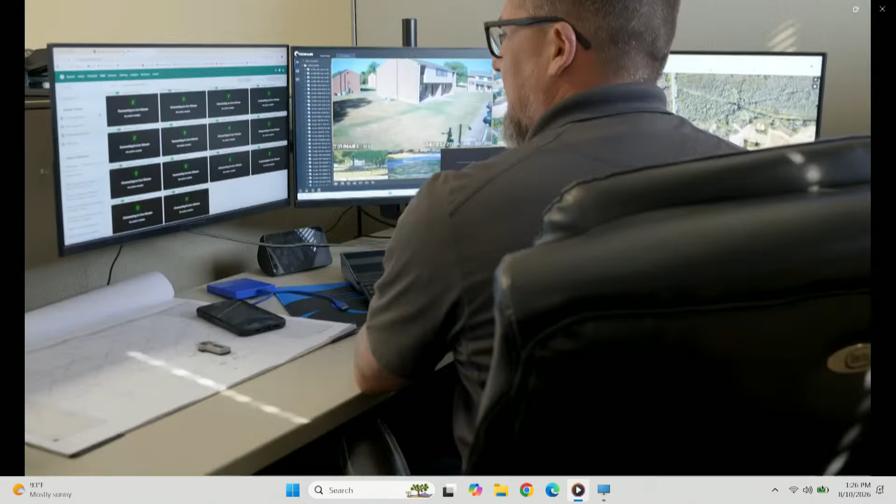The initiative combines a real-time crime center with a drone first responder program, enabling in-house operators to launch drones and gather critical information on the scene of a call and relay it to responding officers. The cameras help serve as a multiplier for police presence, such as by alerting the department of crowd situations where they may want a patrolling officer to observe in person.

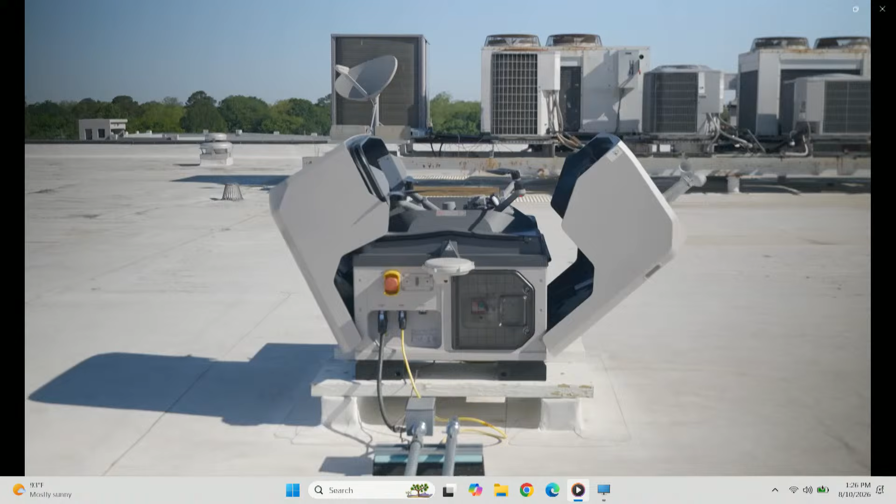The initiative makes use of 3 dock-mounted drones, more than 45 stationary license plate readers, 8 live view cameras, and access to more than 300 community cameras, including those found at local businesses and Florence Housing Authority properties.

Florence's growth story shows how investment in public safety can help generate much larger private investment, and Safe Community supports that momentum by making the city more attractive to developers and visitors. City leaders should always look at safety as a part of their broader redevelopment strategy, not just a police matter.

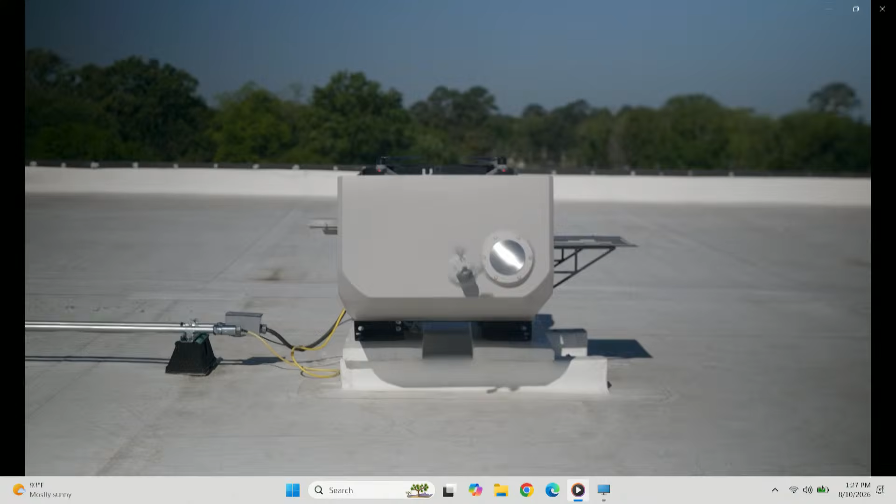In the first 6 months of camera usage, the technology helped in more than 100 investigations and assisted in 55 arrests, the recovery of 36 stolen vehicles and 30 stolen license plates, as well as the location of 7 missing people. Florence, like any other agency across the state and even in the nation, we face staffing shortages that have just plagued the department and the law enforcement community, it seems like.

We knew that the technology existed out west that we use a lot, and it started making its way out east. So we looked into this drone technology and camera usage just to see where we could really have a force multiplier for our resources so that they could not be stressed so much, not be strained so much out there on the street. We found that it was a great fit for us because it was a scalable project.

We started with a few camera readers, license plate readers, and then we were able to really expand by integrating the community into the project by allowing them to register cameras with us and get access to private business cameras.

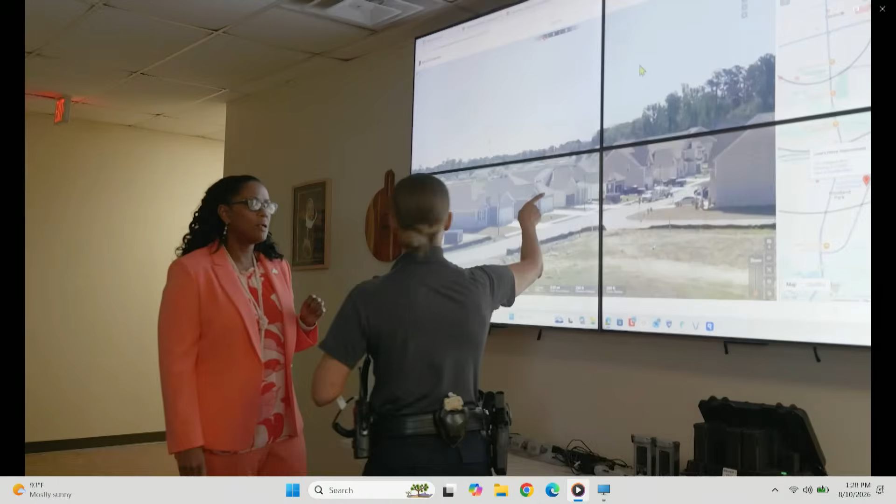Initial support for the cameras came from state funding, after which the city approved funding for the initiative's expansion, including the drones. Future plans include hiring additional staff for the crime center, encouraging community camera participation, and potentially investing in gunshot detection technology.

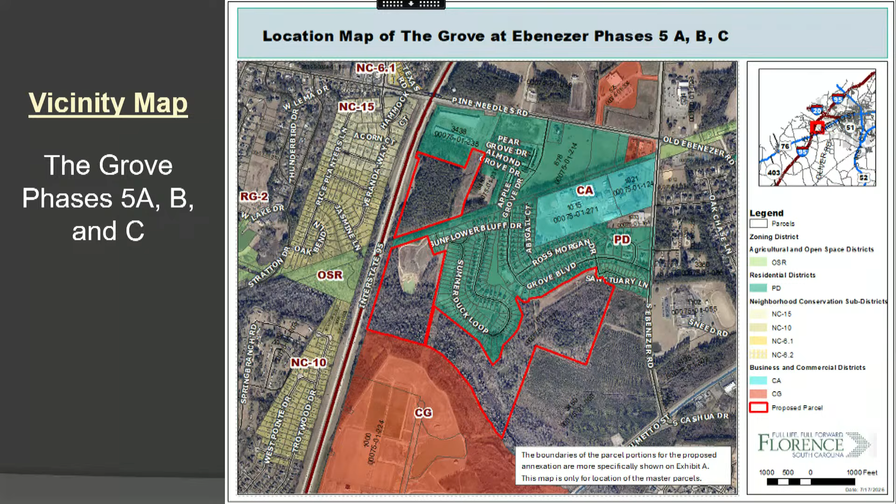This is phases 5A, B, and C of the Grove subdivision. This goes back to a development agreement signed in 2016, whereby portions of the Grove annex and zone to Planned Development District as they develop, and these phases are getting ready for development. This map identifies the master parcels, and Exhibit A identifies more precisely the portions proposed for annexation. The proposed subdivision will include 219 single-family residential lots. That concludes staff's report.

Madam Mayor, Jerry, if you don't mind, show everybody where the extension of the rail trail cuts through that property. Sure, this is the existing rail trail along here that takes a turn and comes back down and cuts through Middle Swamp, connecting in with the soccer complex. So the original rail trail ended at Ebenezer Road. That's correct, but with this expansion and partnership with the folks at the Grove, this extension of the rail trail cuts through the Grove property and then heads down over to the soccer complex. That's correct.

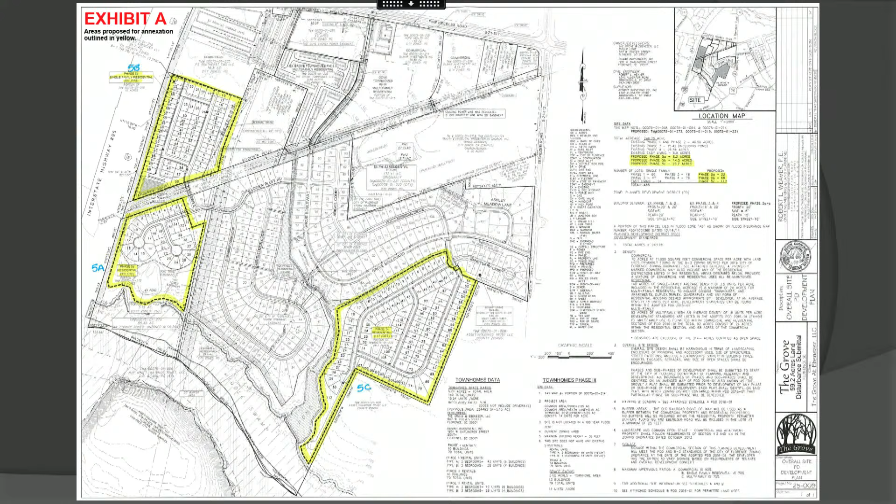Thank you so much. Now, all those in favor signify by saying aye. Aye. Opposed? The ayes have it.

Next, we will have introductions of resolutions. Resolution number 2026-34, the resolution of the City Council approving downtown redevelopment grant for the first quarter. This will be taken up into executive session.

So we move to resolution number 2026-35, which also will be discussed in executive session. So we move to resolution number

2026-36, a resolution authorizing the execution of the municipal state highway project agreement with SCDOT for proposed improvements of East Palmetto Street. What say you? Second. Thank you, Mayor, members of council.

This resolution, along with the following three resolutions that will come in sequential order, are very similar to one another. Anytime DOT is moving forward with a major project within municipal limits, as part of our agreement—I want to say it's from like the 1913 agreement, a very old agreement—we must review and approve at a conceptual, large-scale level the project they are moving forward with.

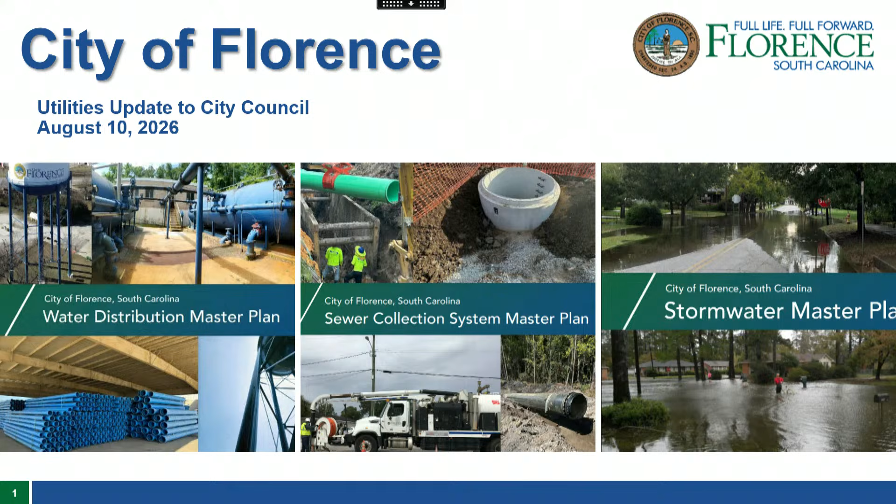Mayor, council, thank you for the introduction. I haven't taken a second job with CDM Smith, although two salaries would be cool - I actually work for AECOM. We'll fly through your updates here. I know you guys long awaited both the water distribution master plan, the sewer collection system plan, as well as the stormwater plan. We've got the plan, and now we're going to work the plan, and this is just a quick update of what we've been up to.

With the water distribution, I have Mr. Kieran Ryan, who used to work for CDM Smith, but we stole him, so he's working for AECOM now, and he'll cover the water side.

Afternoon, Mayor, council members. Just to brief you guys on some of the ongoing projects here. I think I clicked one too many times, so just head back. There's a couple projects that are ongoing right now in different phases.

Oh wait, didn't we just receive money for the Hoffmeyer, from the state government? Did we receive some funds for that? That'll be in the wastewater updates. Wastewater. Yes sir, okay, yes sir, I knew that.

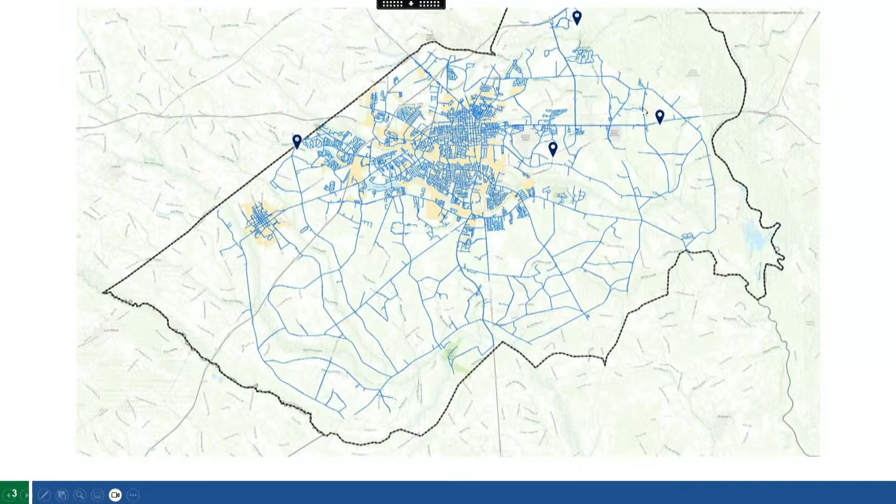Starting with the GE groundwater treatment plant, this was a SCIIP funded project. This was a decommissioned plant for quite a bit of years, and so we used that opportunity to get this plant rehabbed and pretty much up in operation again. So the two left pictures you see there are the two high service pumps, and then you have an altitude valve building as well to control the elevated tank there. And then a big portion of this project was converting the pH correction from a dry bagged solution to a lime slurry.

This plant will serve all the other groundwater plants in the region as a hub for lime slurry. Operators can go there, fill up the day tanks, and deliver that product to the other plants, saving a lot of money long term and not having someone else have to do that.

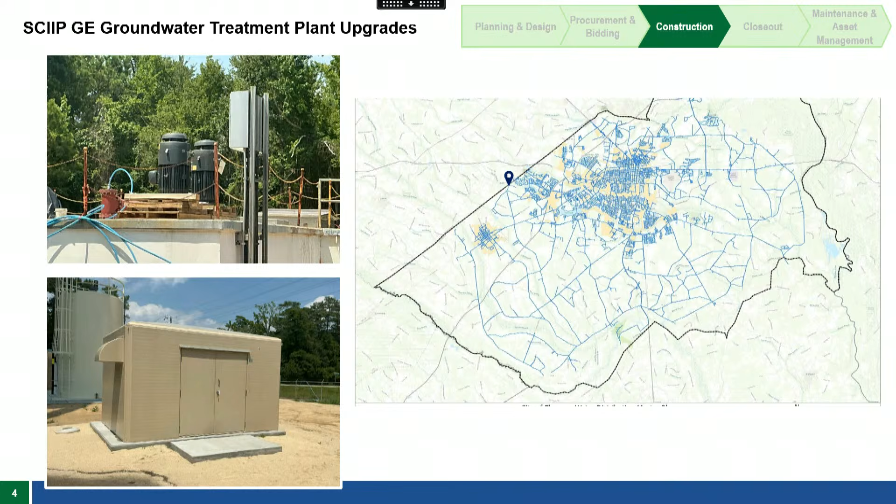Estimated completion of construction should be by the end of the year. We are held to a pretty hard SCIIP deadline to spend those funds, about end of September, which we are on track to hit. But there is obviously some startup and some training on the SCADA stuff that will delay that a little bit.

Continuing off that, we just started in design a pretty large and complex project. It's taking that same approach, but now for 6 additional groundwater plants, including South Florence, Oakdale, Pine Street, Darlington, and some others.

It's a really big project, and I wanted to give a little education on the CMAR aspect of this and how we took this to an alternative delivery than a typical design-bid-build. Being that there's 6 treatment plants and 6 different sites, having 6 different contractors would cause a lot of issues. So what we're trying to do is consolidate that into one project, one contractor, and there's a lot of benefits to this. So I'm going to work through a timeline.

There's going to be a lot of different milestones throughout the project. Starting with our first phase, the planning, which is the PER. We delivered the PER for all 6 of those plants with the scheduled upgrades in June of this year. That's our first starting phase of getting the framework developed for our future plans to further design it. Then we have our 30% design milestone, actual drawings, spec lists, and a real package put together, estimated for December of this year.

Why is that a key milestone? Because at that point, that is where we're going to start to look to engage the CMAR. Once we have our 30% design package, we'll plan to advertise that out and start to recruit CMARs and general contractors that could do this type of work.

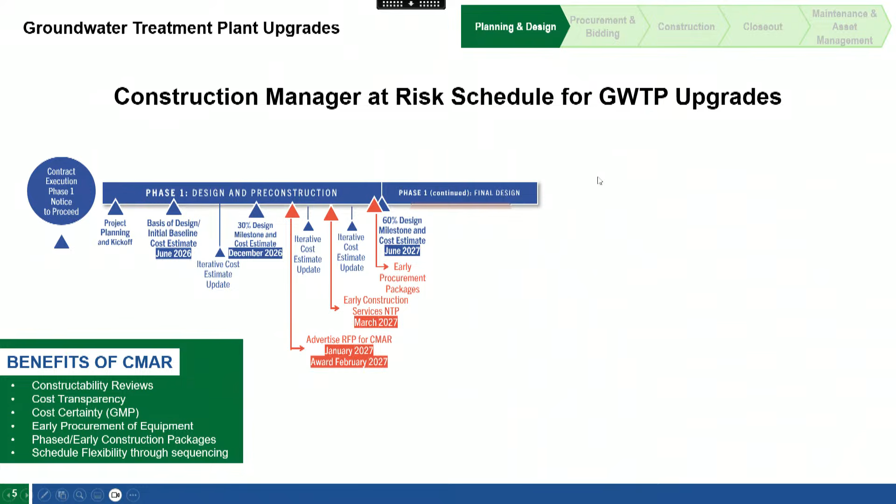As we continue through, we go through final design, and you can see that orange is where the CMAR activities they're going to serve. They'll provide us a guaranteed maximum price for the job to make sure that doesn't get exceeded, it's a locked in price throughout construction. That typically occurs at 60 to 90% design. Then we start to get the notice to proceed for the construction work in July 2027 anticipated, and then we advance into final design, which would be December 27, and so on.

Phase 2 construction, you start getting into the construction and the rest of the project timeline. Bottom left is really, really key benefits I want to note here with doing a CMAR.

You have a lot of constructability reviews. These plants are pretty dated, it's a pretty complex system. We want to make sure contractors can get their eyes on it and make sure we're making the right design decisions. Cost transparency - when they go and research and order and get quotes, they submit that to us, the engineer, for our review to make sure all costs are identified and we know exactly what they're getting in terms of cost for those pieces of equipment.

I just mentioned the GMP, the guaranteed maximum price - it locks us into that maximum price that won't get exceeded. And then early procurement, getting started early on equipment, long lead time items. Early construction packages, like I was saying with that generator or any other project that might be upcoming, we can write that out and get that into construction earlier. Ultimately, they're really going to help with the flexibility of scheduling this work. Six different sites and their associated wells is very complex. They're going to be able to come in and say certain plans should be done in these periods of time, and really help with the overall construction sequence of it all.

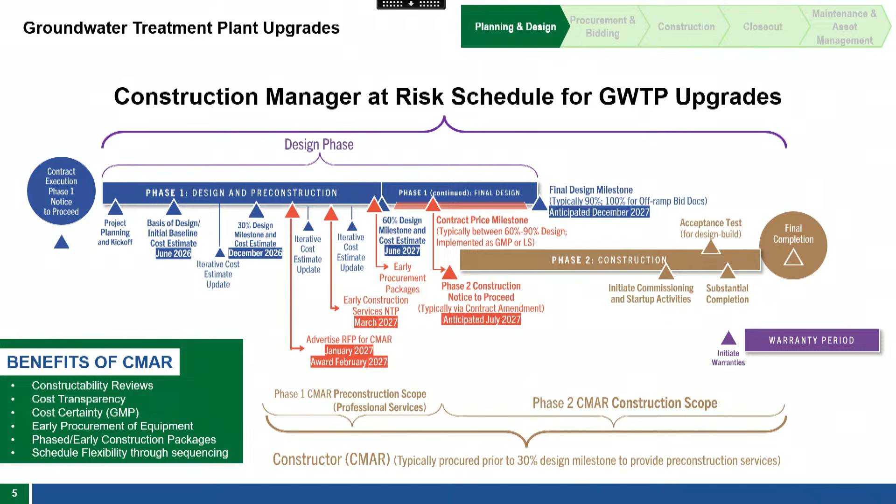Which plants are we doing first? I always forget one or two, but it's Pine Street, Oakdale, Darlington, South Florence, Gully Branch is the fifth, and then Alligator - yes, thank you.

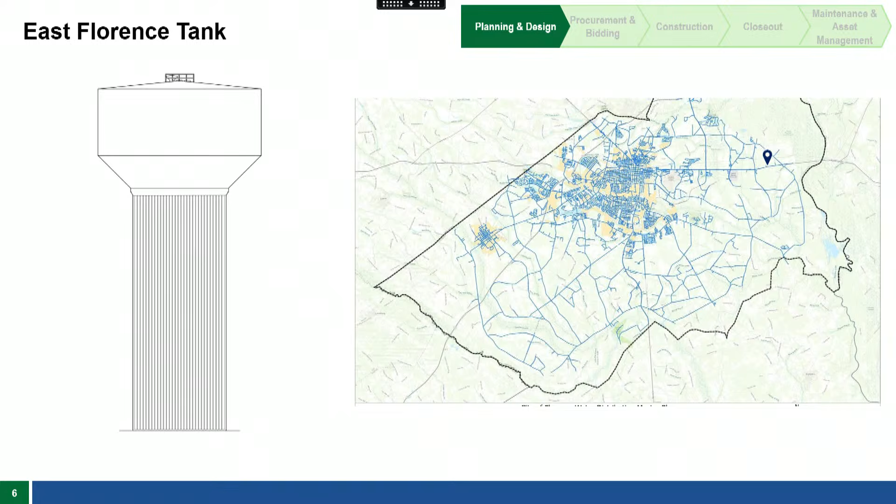East Florence elevated water tank - this is a 1 million gallon elevated storage tank. Another portion of the project to support the Florence expansion towards the eastern portion of the site. This will also assist with the surface water expansion project, making sure we do get some storage out of that as well. Right now it's about 30% design. I think we're getting geotechnical services to make sure we get recommendations on the foundation, things like that, but that one is progressing as well, still early in design.

We have the Freedom Boulevard waterline extension, which is really going to connect that surface water to bring water down to the southwestern portion of the system. Right now they're actually finishing up construction - I believe they're just working on testing those water lines to make sure they're installed correctly. So this one is actually starting to finish up construction, and maybe a couple more months or so it might actually be ready for use.

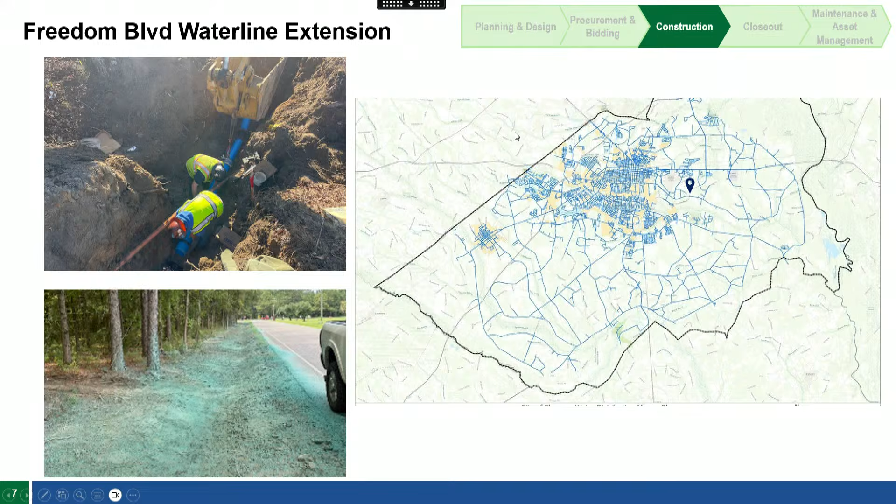We've talked a lot over the past couple months about the SCADA improvements and the installations of the RTUs and all the different types of equipment that make it easier for operators to report that data online. It's actually in a really good standpoint now - the first phase is complete, where all these plants are online and operators can view this on a localized system from their iPads and respond earlier. But now this segues into long-term improvements, which involves trending this data over months, weeks, years, and us being able to make improvements based off this data while reading it in real time.

So this first one here kind of goes over the elevated tanks, and what we're able to do is track that elevated tank level over a month's time, identify when that pressure got too low, and we can make improvements and review the system and run modeled scenarios to help improve those tank levels over time. So that's just an example.

You could see the pressures as they go through, 1 week or 2 months. You can always set it and change it to however you want to make it look good.

But also with the elevated tanks, there's also at the plants itself. So the iron levels, the chlorine readings, the pH readings, those are trendable data now that operators can see, and we can make suggestions to ultimately help control the iron getting out into the system.

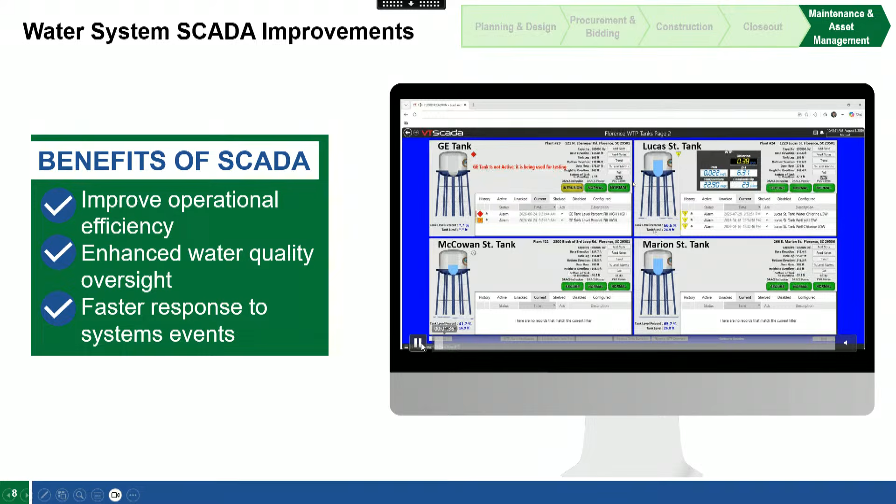Hey, what's the red dots, is that offline? I think they're just color coordinated to determine what's an elevated tank, what's a plant, or if there's an alert, that's usually when it pops up red too.

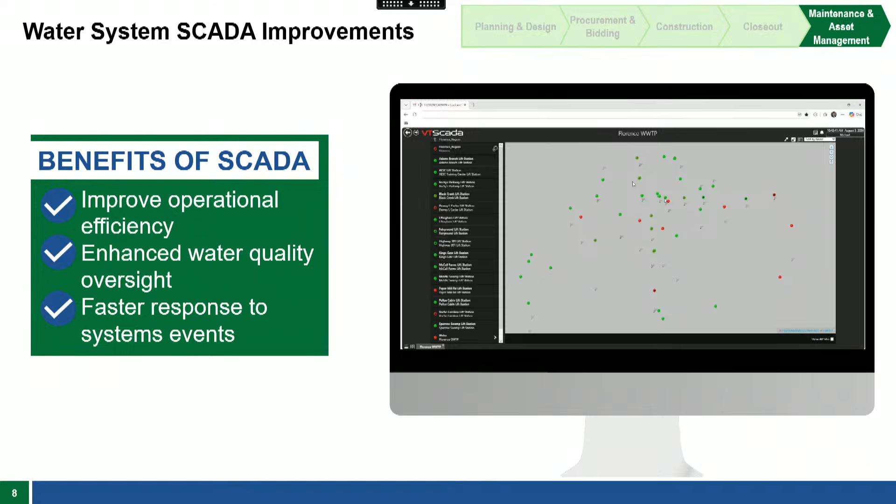So this is still, I'm sorry, I'm going on. No, George. So I think we kind of have merged two different parts of the water. We talked about water distribution, and I think the SCADA now we're talking about water quality.

Is that right? Well, it's a lot more than that. It is distribution too, because it tells you the elevated storage tanks and how well they're keeping water, if they're ever hitting those high water levels. So it is all things, and there's also flow meters out there that are now reporting back to SCADA. So we know exactly how much water is being produced at each of those plants. There's pressure monitors to the distribution system, so you know when the pressure's dropping in certain areas.

I guess we are all interested in the distribution, of course. That's very important as we expand the system and correct the system and all. But the driving, the community has been intently, acutely aware of water quality. And is there any way in your presentation for next time that you can break out water quality from water distribution so that everybody can see very clearly? Because I think that's actually a fourth master plan that we did, was the water quality master plan.

And initially you showed the three. And so if going forward we can have the fourth master plan, which is the water quality one, and break that out, because I think it's easier for our citizens to focus in on that if it's in a special segment going forward. Does that make sense? Absolutely. Yeah, okay, certainly, thank you very much.

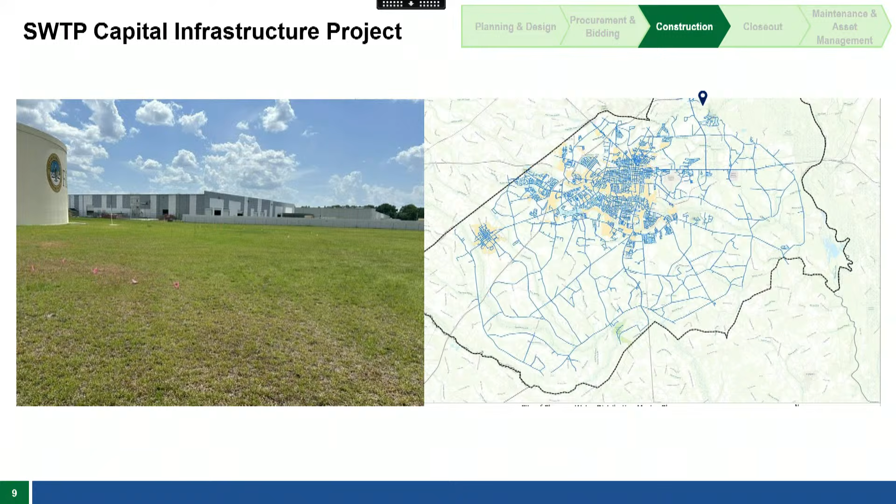And then lastly, talking about cybersecurity, with all the SCADA improvements and everything, it's important to make sure your system is protected from potential threats. I believe there might have been some threats, but ultimately the city made sure they took all their PLCs and anything that could have been hacked into off the cellular system and onto Ethernet cable, and reported that there were no current issues. They're going to make sure that's maintained regularly to eliminate some of those impacts. In addition, we work with city staff on emergency response plans that specifically look at these types of threats, giving a plan of action to address them if you do get compromised. That's something we partner with you guys on.

Okay, and now I'll hand it to Michael to talk sewer collection.

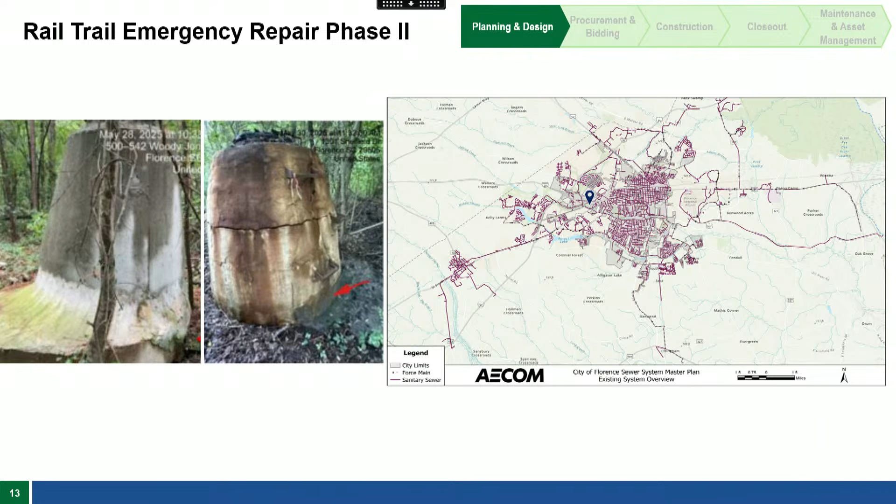That's more on the planning side, but we're moving to construction shortly. That's by the mall, right? Yes sir, that's over by the mall. Okay, yep, 90 days.

Moving forward, Mars Hill Gravity Sewer. This is a CIP project. The major benefit is that it eliminates an old, outdated pump station that was prone to breaking down and causing backups and O&M nightmares. We were able to find enough elevation or grade in the system to eliminate this pump station completely and flow all by gravity. So you're taking one pump station out of about 130 something, and you'll have one less to pay the power bill on or to O&M once this project's done. We're working on final seeding and stabilization of that site, and it should be done in the next month or so.

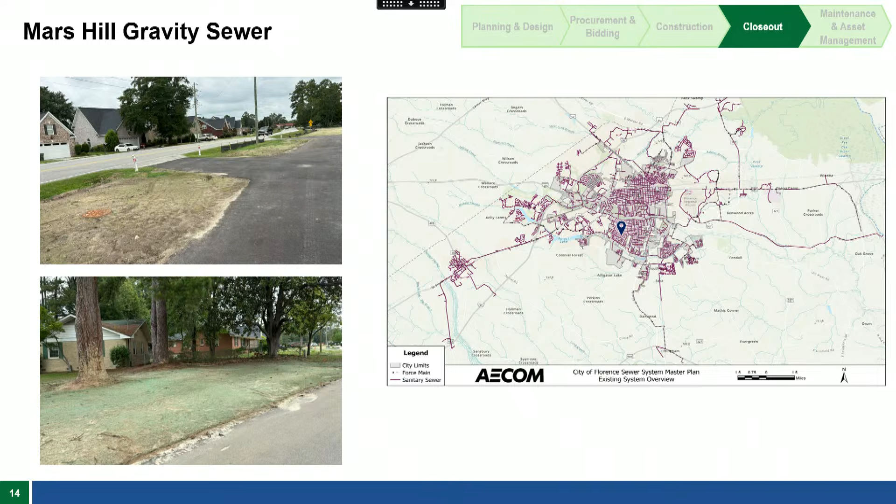All right, this is the Jeffries Creek overview map. We have 3 phases to talk about today. Phase 1 is the pink line, phase 3 is Council Member Braddock's Big Dig, and phase 2 begins up at David H. McLeod, wraps around Woody Jones, and then through and across Jeffries Creek, ending right there at Naturally Outdoors, essentially.

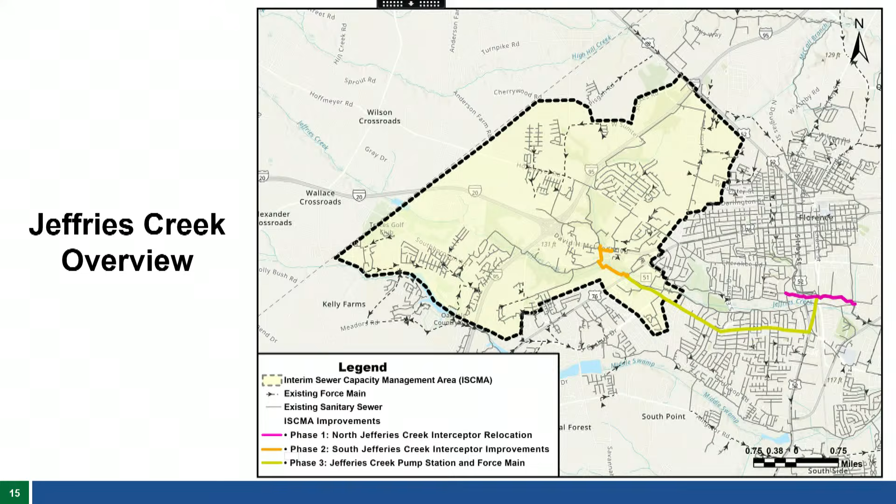All right, Jeffries Creek phase 1. This one's being designed, permitted, and managed by CDM Smith. Here's an overview of their plans. We're replacing old, outdated clay lines. You've got a lot of joint deflections, cracks, and breaks, and these lines have just outlived their useful life. They're coming through this corridor with modern materials, PVC, ductile iron where needed, to increase capacity. I think they're going from like a 30-inch to a 54-inch diameter line here.

Phase 2, we're working on this. We're about 80% done with the topographic survey. This is a photo of the main line crossing Jeffries Creek, behind Woody Jones, between the rail trail. Same problem as downstream: you've got a lot of old, outdated infrastructure. It's failing and simply doesn't have the capacity for you to grow this sewer shed. So that's one of the major needs.

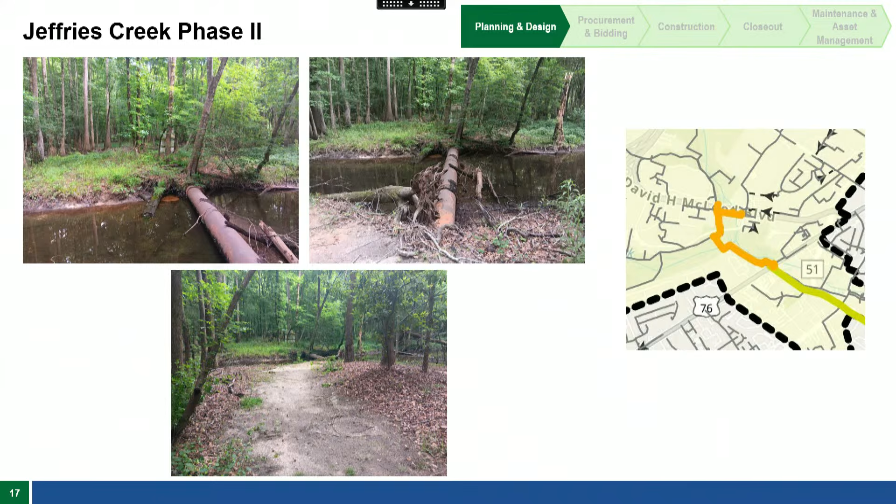But are we putting down these new pipes and then going to have to move them when the bridge gets here? That's what I'm... No, ma'am, that's on South Cashua. This is on Second Loop. Okay, of the Jeffries Creek Bridge? Yes, ma'am. Okay, so this is in two different places? Yes, ma'am. And that's what I really want to know, because all I keep hearing is Jeffries Creek, and I'm like, okay, where are we, because we've got a lot going on.

South Cashua at Jeffries Creek, coming from 5 Points going towards Second Loop - that'll be the DOT project, at that particular bridge. Once you get to South Cashua and Second Loop Road, that's where that big yellow line is, that particular work where we'll be putting the new infrastructure in to offload the existing Jeffries Creek interceptor. It's nowhere near the bridge - this is completely on Second Loop. There's your bridge, in the upper right. That's your bridge, gotcha.

I'm gonna move, we're moving around a little bit. Okay, everybody's good with Jeffries Creek and our sewer improvements there?

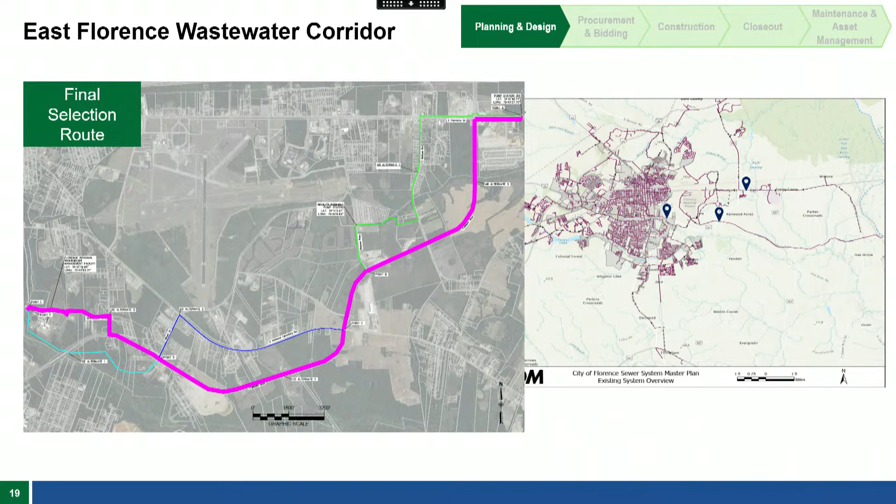Well, one thing I just want to say is thank you, because I remember when we as a council had to make the decision - we've got to do something about our situation. All over the country, the infrastructure is crumbling. However, it's not a sexy thing when you're a politician and you have to tell people we're going to have to find monies to do these projects. So when you stepped up, George Bailey said this plan has been a long time coming, so we want to thank you - I'm talking too fast. Are you finished? Nope, I'm not finished. You're not finished, I keep trying to rush you. We're still going, okay, well go ahead then. But I'll appreciate just your commitment to finishing this project. I can go at hyper speed now.

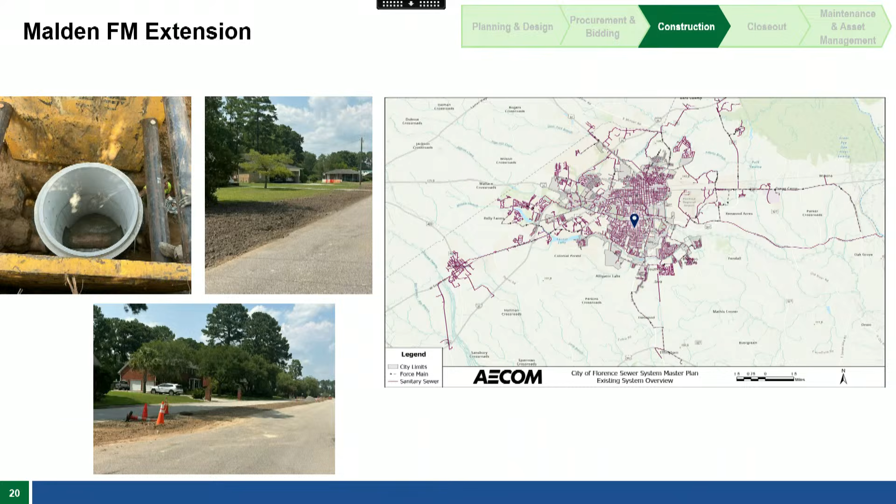This is a small utility project we're working on in the Malden neighborhood. We've had some issues with sewer overflows mixing with stormwater. We want to keep our stormwater clean, so we're addressing that by rerouting this force main connection as we plan for the stormwater, which is going to be another slide. This project will be done in the next month or so, so that'll be a good one to show.

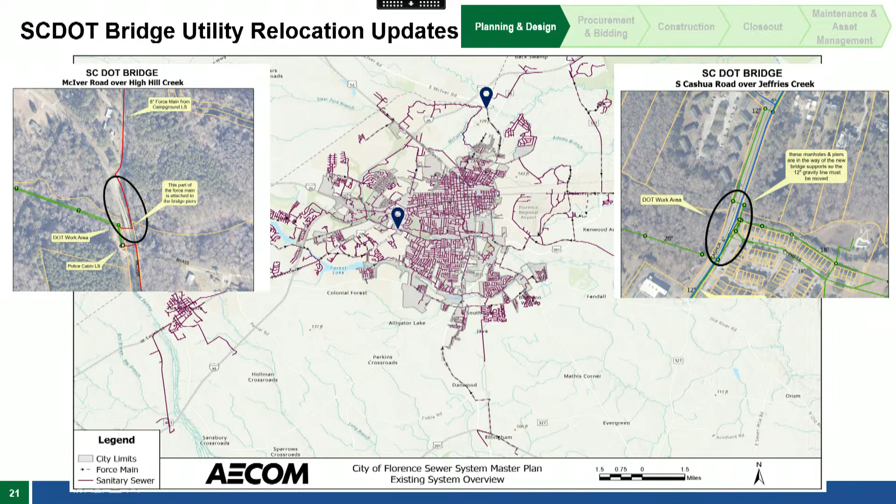All right, stormwater. This is the last master plan to cover. It only has 3 slides. No rush, stormwater's always the smallest though. Yeah, this is mostly DOT's problem.

Cedar and McQueen is moving right along. You may have noticed the Coit Street near Cherokee closure for a few weeks. That was to facilitate the installment of this massive box culvert, which measured 3 feet high by 72 inches wide. This receives a lot of the stormwater that runs down Irby Street, and there was a bottleneck and pinch point here, so we were able to open that up and get that system flowing.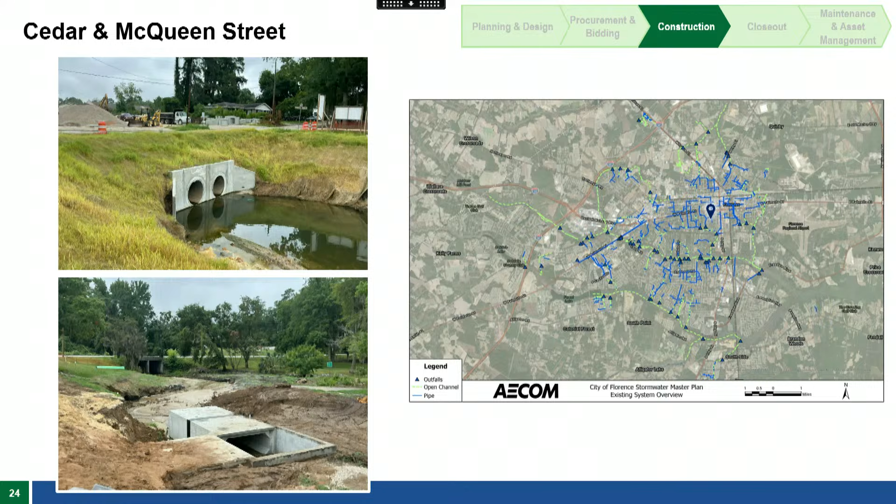We're in the final steps of stabilizing it. You'll notice some massive boulders will come into play to help stabilize these stream banks and the soil around this pipe. Upstream of that, still in the Timrod Park area, this is where Cedar Street crosses Timrod Park's run. We've got that pipe upgrade and headwall, and the open channel improvements are completed.

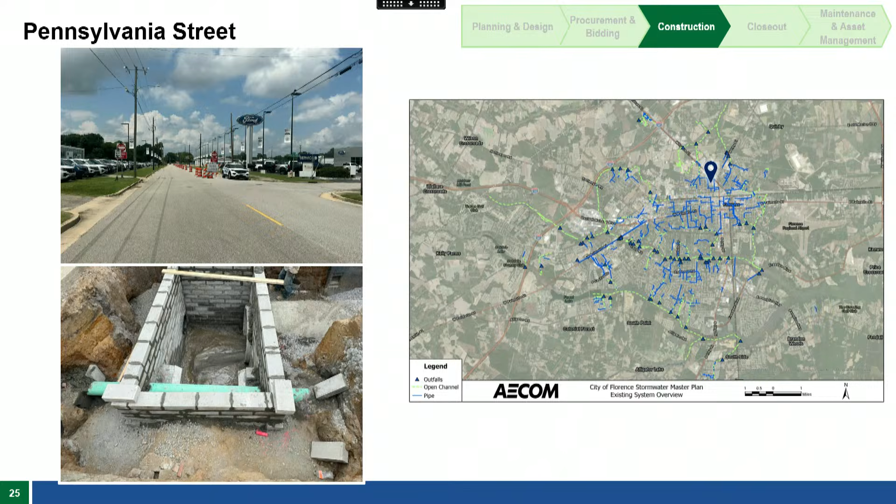We have plenty of work still to do in this storm drainage basin over the next few months. Pennsylvania Street, we're actually working on Coit Street. This is the last step of the project. We're upstream over by the Ford dealership there. We've covered a bunch of storm drain inlets, added them, and we'll be done with this one in the next month or so. That was SCORE funded.

Church and Oakland, I don't know a ton about this one other than we're working on minor flooding, intersection improvements, outdated inlets. We have a contractor set to begin construction in the next 2 months once he gets materials rolling.

Councilman Jabali? Yes, sir. Michael, this is the famous catch basin to nowhere? Yes, sir. Okay, and we have been diligently trying to find an opportunity to have it become a catch basin to somewhere. Correct. So can you show us where the outflow will go?

I'll let Clint come on. This is a project Clint is specifically leading with Ardoro, our other engineering firm, because we're talking about the catch basin over there at Iola Jones Park at Oakland Avenue.

That's right, so the upgrades are mainly along the Oakland Avenue corridor. So big picture view, we will be looking to create actual catch basins along Oakland Avenue, and then bring it around down Norfolk Street. Then there are 2 outfalls that tie in. If you're familiar with the baseball field back there, that area has a couple of outfalls, so we're improving those outfalls and tying that all in.

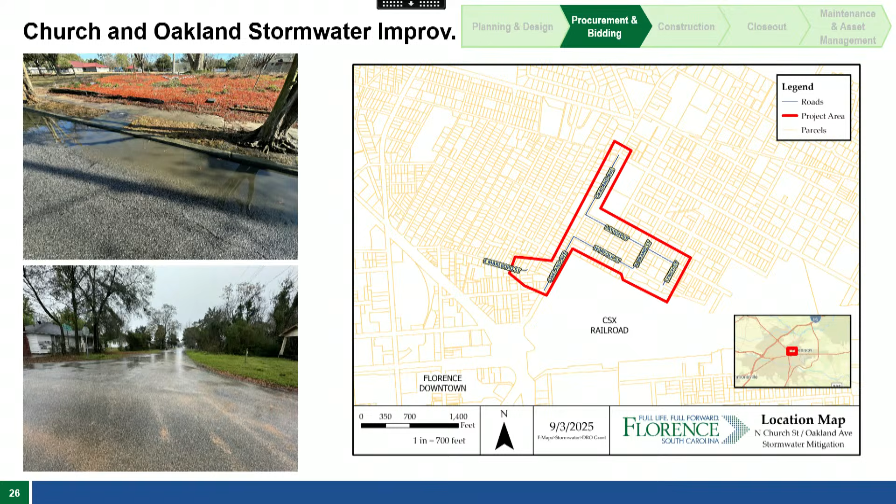Okay, and then last up on the stormwater side was a collaboration with the county. They had a small project in the Malden Drive area. I believe that is almost finished, and then we're working with city staff to pursue some FEMA funds, just going through the front end calculations to determine if it's a feasible project to try and upgrade the trunk lines crossing second loop, which is not going to be cheap.

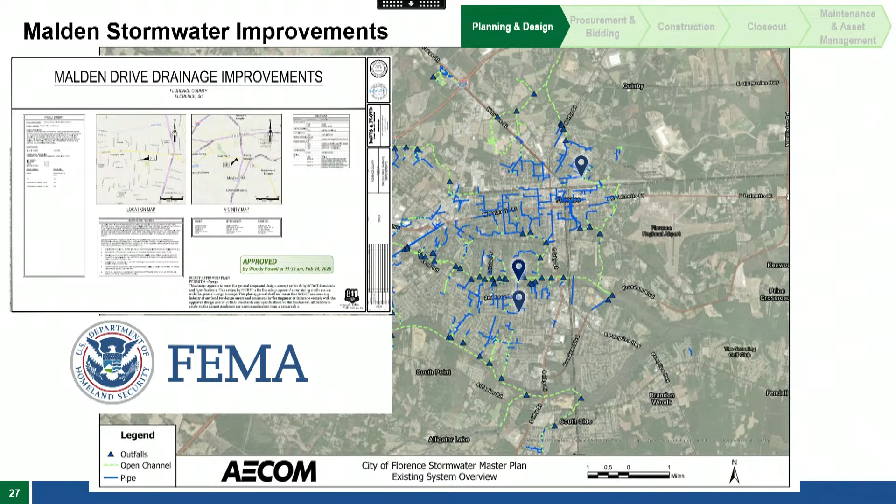And that is all we have for you today.

Michael, you're finished? Yes, ma'am. Okay, no, I'm not trying to get you to do anything extra.

I have one question. On stormwater, someone brought to my attention vegetation growth around the inlets of the stormwater catch basins. Do we have a maintenance schedule or maintenance plan for clearing that vegetation? You got a specific location? Irby Street, I can send you some pictures. All right, and Josh Whittington, utilities director, that falls in his purview. So Josh is taking note based on what you just said, and we can get staff to look at that.

Yes, sir. Anyone else? All right, thank you. I'll say again, thank you for your work. Yes, ma'am, appreciate it. Thank you for city manager seeking you out to make it happen. So thank you so much. All right.